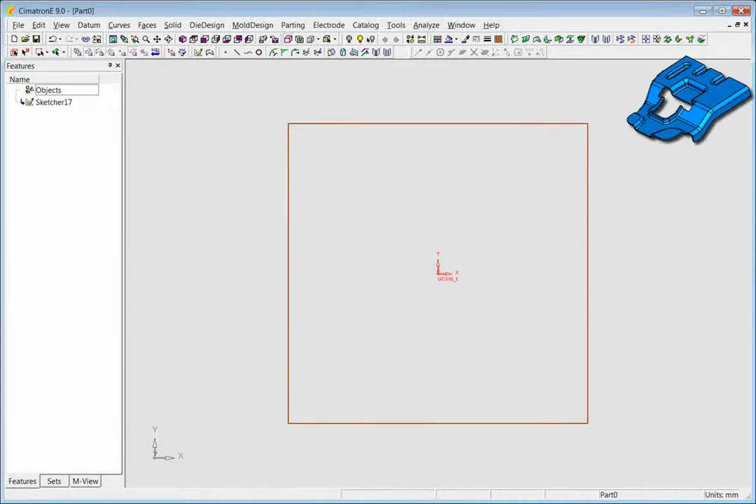The first step is to designate the object as a skin. We will then sketch the boundaries of a wireframe blank on the skin. The next step is to swiftly remove a solid extrusion from the skin.

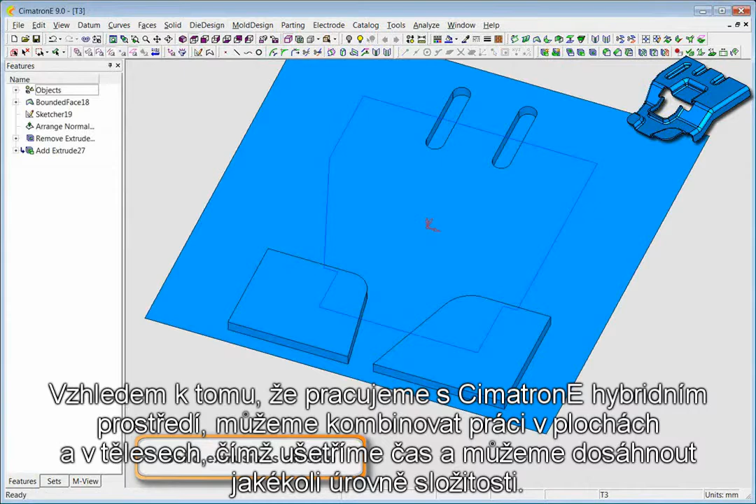Because CimatronE provides you with a hybrid environment in which to work, you can perform both solid and surface operations on the skin to save time and easily achieve any level of complexity. Solid operations you can perform on the skin include all kinds of extrusions. You can also round on the skin and cut, as well as extend, wrap, create holes, and more.

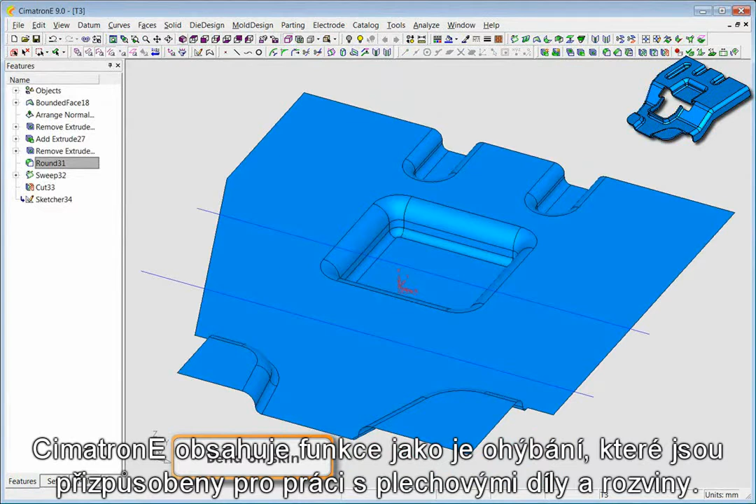CimatronE includes applicative operations like bending, which are tailored to work with sheet metal parts and strip design. While we freely perform bending operations on the skin, CimatronE takes into account the fact that the skin represents a piece of sheet metal with a three-dimensional character.

You can seamlessly tackle operations like rounding on the boundaries of the skin, as we have demonstrated here.

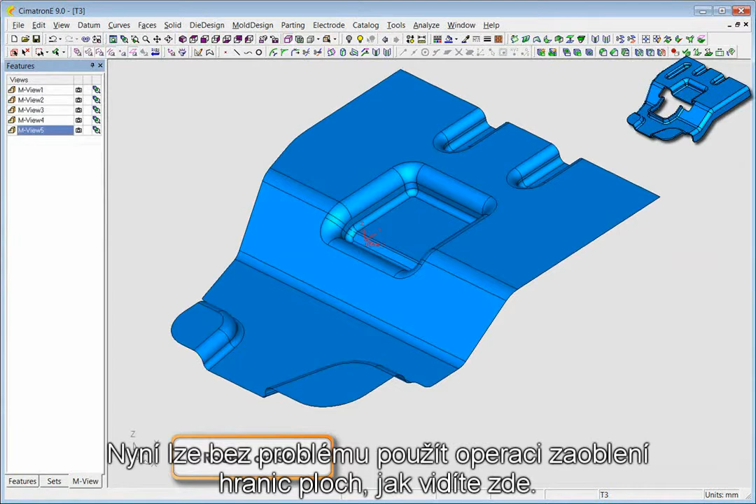When you add a surface to the skin, as we are doing right now, on both sides of the object, you can perform a solid operation to round the joint, or you can perform a surface operation and quickly make modifications using a rich set of surfacing tools.

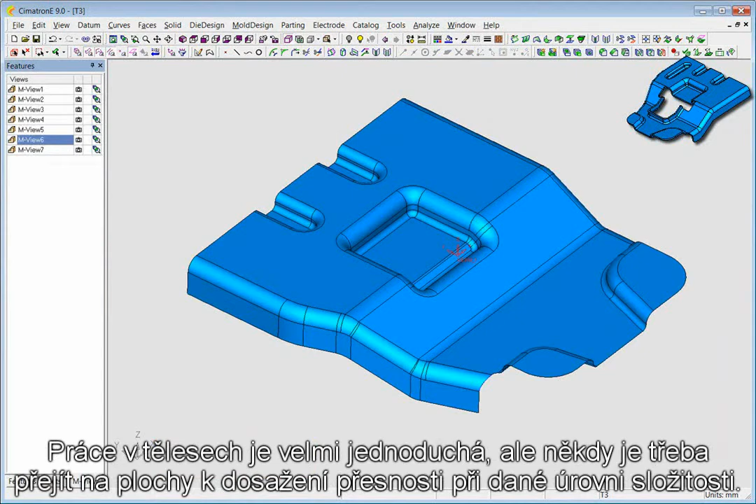Working in solids is fast, but sometimes you need to switch to surfaces to achieve the accuracy and level of complexity you're looking for. That's not a problem on CimatronE, where all solid and surface operations are available at all times. In this section, we are using a combination of surface and solid operations to achieve exactly the geometry we want, quickly and simply.

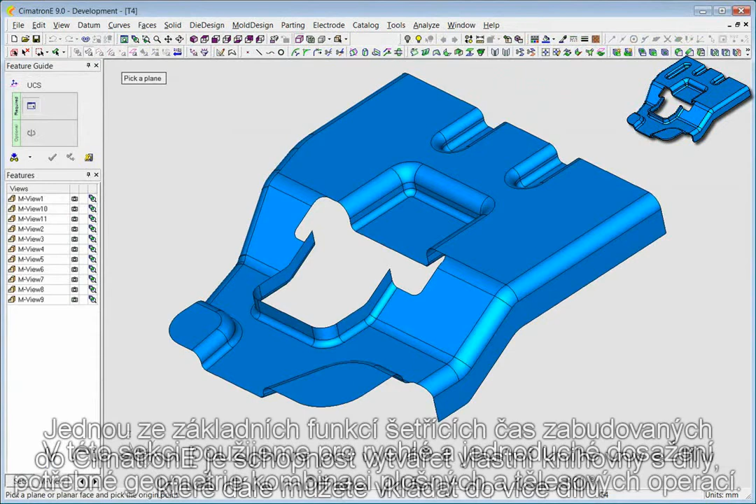One of the essential time-saving features built into CimatronE is the ability to create a personal library of features you will be using in more than one part. Here, we are using a dimple we had stored in our library and inserting it into the object.

The hybrid environment allows you to immediately incorporate the imported item into the skin, and it is recognized as part of the object straight away.

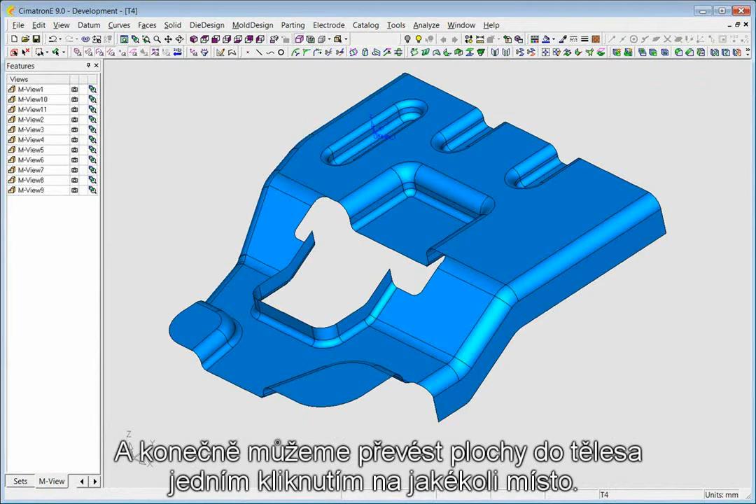And finally, you can convert a skin into a solid shell in just one click at any point. And you can continue to perform operations like rounding on the solid object.

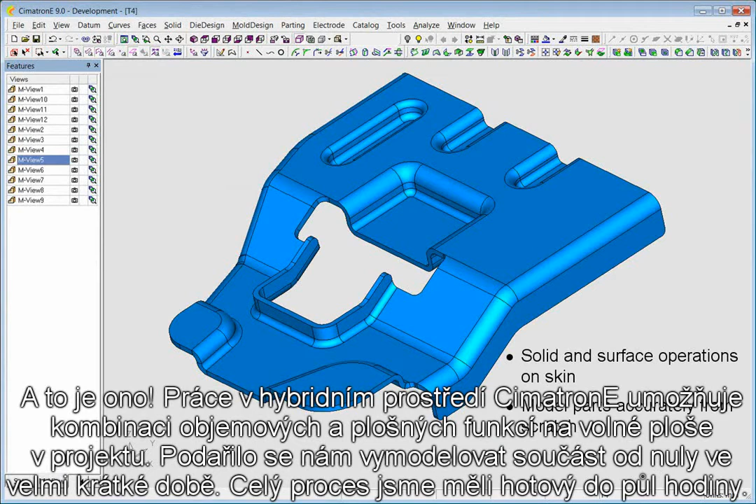And that's it. Working in CimatronE's hybrid environment to perform solid and surface operations on the skin freely throughout the project, we have succeeded in modeling the part accurately from scratch in a short period of time. The entire process took under a half hour.